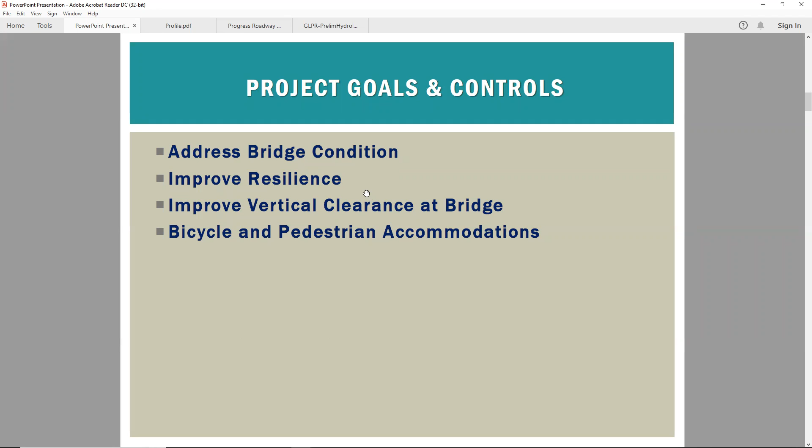So as Greg mentioned, we're going to go over how we got here, just reviewing quickly the goals and the controls. And then we'll look at the profile, the plan, the property impacts, talk a little bit about the bridge design, then open discussion and next steps. Going back to the beginning, our basic goals were to address the condition of the existing bridge, to improve or provide resilience, to improve the vertical clearance at the bridge, and to provide bicycle and pedestrian accommodations. The bridge condition is addressed by providing a complete replacement.

We talked a lot about resilience, and just to rehash some of the basics, the low point on the roadway now is elevation 7.8. The 50-year flood event elevation is 7.6, and the 100-year is about 2 feet above that. We noted that trying to increase the elevation of the causeway has substantial right-of-way impacts, and so we settled on a target of elevation 8.6, which is 1 foot above the 50-year event. And we also aim to improve resilience by armoring the causeway with heavy riprap along the banks to prevent washouts. Jonathan, you said 1 year above. 1 foot above the 50-year event. Sorry if I misspoke.

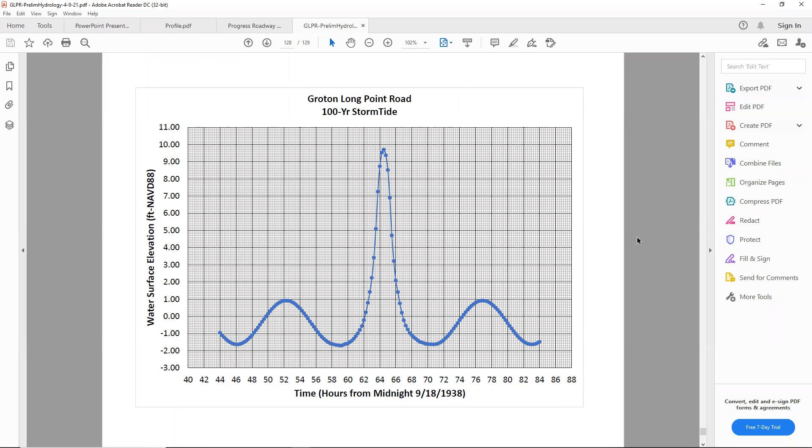Our next goal was to improve the vertical clearance at the bridge. Control for that was obviously right-of-way impact. Because there is some distance between the bridge and the adjacent properties, we were able to pick up the low chord, which is the bottom of the steel on the bridge, substantially. You'll see later in the presentation, the proposed profile provides a foot of underclearance for the 50-year event, which is a gain of 3 feet above the low chord of the existing bridge. The bottom of steel on the existing bridge is at about elevation 5.6, and with our proposed design, we're going up to 8.6.

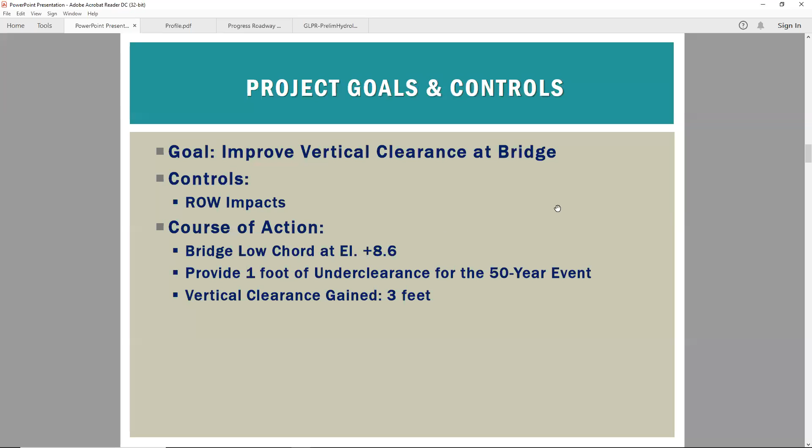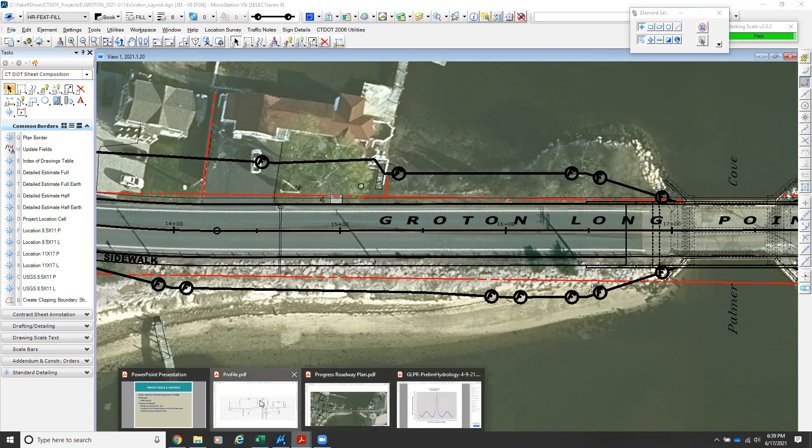Sorry, Frank, you're muted. Jonathan, we probably should save our questions for later, but you lost me. I thought you had a roadway elevation of 8.6. Roadway, blacktop. I'll go quickly to the profile. Our low point is away from the bridge. The existing low point is in front of 981 Groton Long Point Road, and that's about 7.6 at the edge of road. I see. Looking at the profile, that's back here. The bridge is a couple hundred feet away from that.

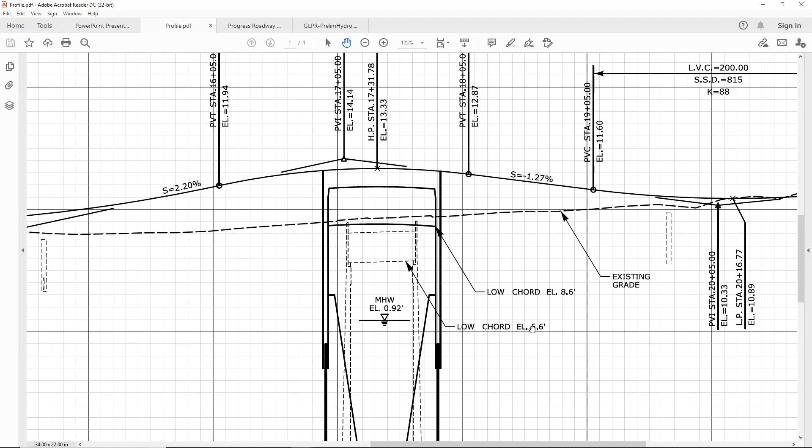But we're making an adjustment. This dashed line on the bottom is existing grade, and up here is proposed grade. So we're not picking up the whole causeway, but we're picking up the bridge and sloping up to that from either approach, such that at the bridge, the bottom of the new bridge is at elevation 8.6 versus the bottom of the existing bridge, which is at 5.6. Thank you. Clear.

And the last goal here was bicycle and pedestrian accommodations. Again, controls were right-of-way impacts because there's no sidewalk there now, and we are widening the roadway slightly to provide bike lanes, and we are adding a sidewalk along the south edge of road. So I guess the right-of-way impact affected which side of the road we chose for the sidewalk, and that's what led us to put the sidewalk along the south edge of road.

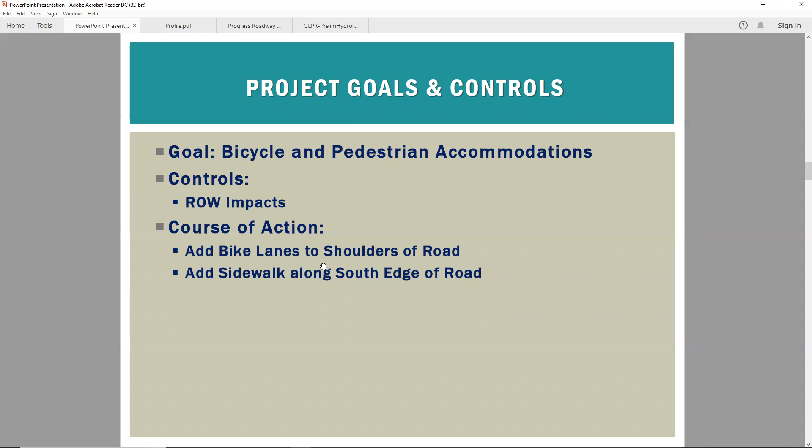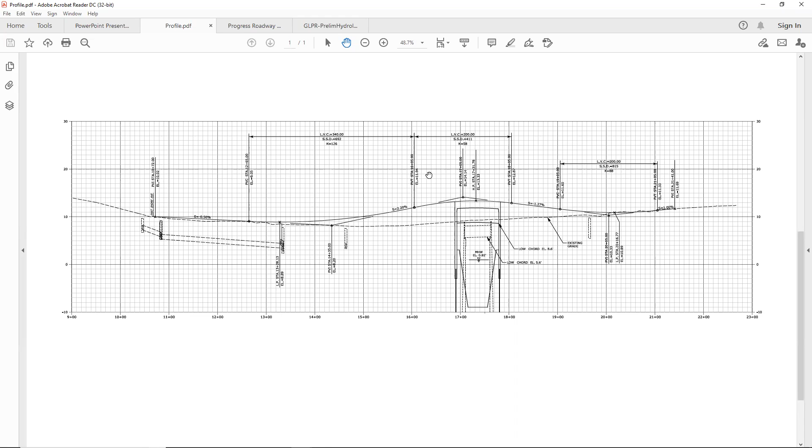So just to get back into the profile. The project goes from East Shore Ave, where we're matching grade. I know this is going to be difficult to see, and I have emailed everyone this figure as an attachment. And we're also matching in at the east end of the project in the vicinity of the restaurant and the beach.

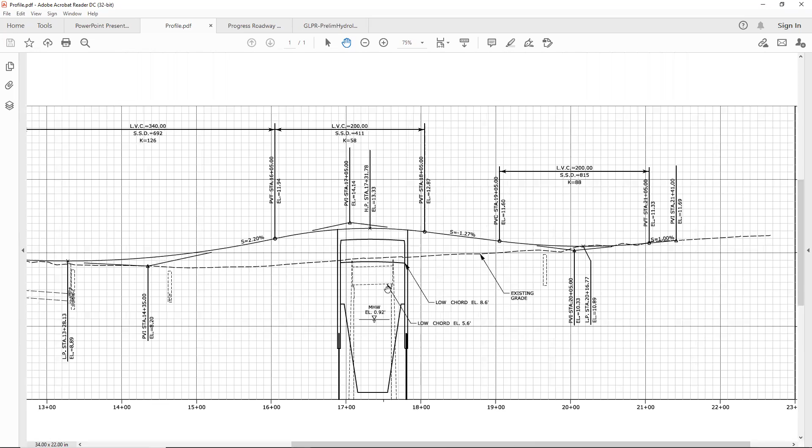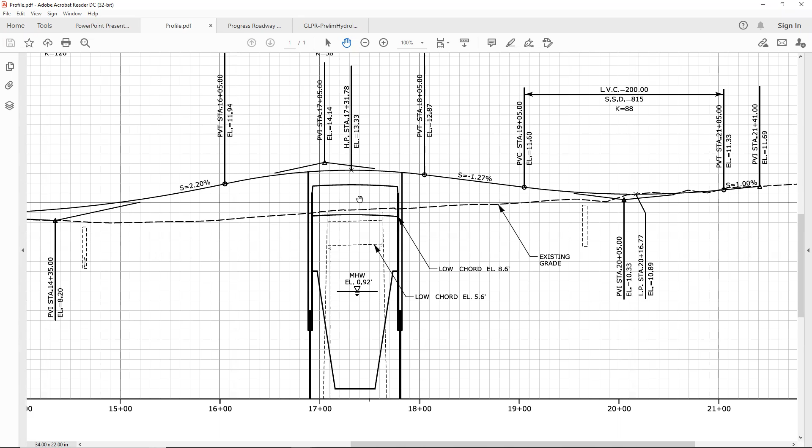And we discussed how much we're picking up the bottom of the bridge, which is about 3 feet. Because we have a longer span, we're going up to an 86-foot clear span in order to bridge over the existing substructures and build behind them, as well as to open up the waterway. We need a deeper structure, and so we're picking up profile grade by about 4 feet at the bridge in order to get that 3-foot additional underclearance at the bridge.

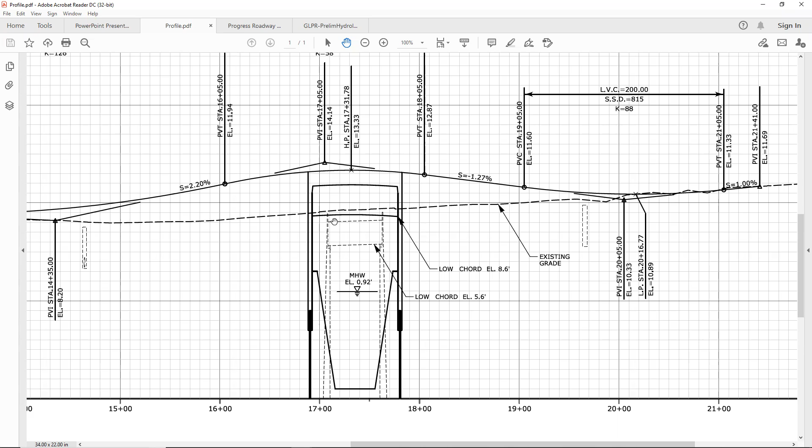Sorry about the cat.

Does anyone have any other questions about the profile? No. I guess one other thing I'll mention is we were able to move the low point away from the bridge to a location where there are existing drainage structures as well as a drainage right-of-way. So there's a drainage right-of-way down this driveway here, which would be convenient for design to be able to utilize.

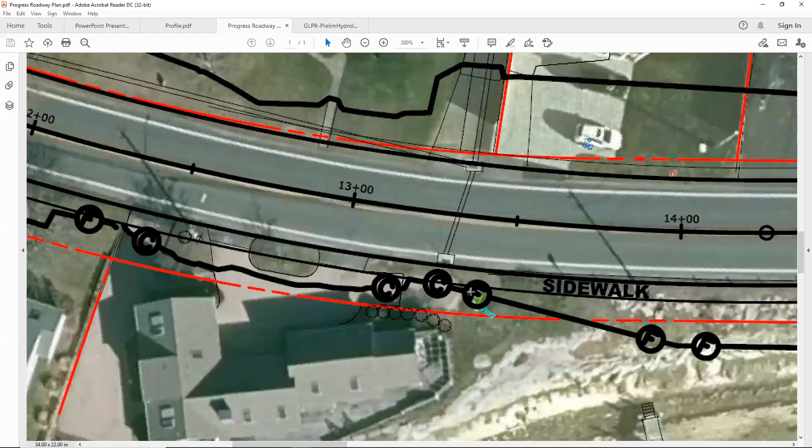All right. Now on to the roadway plan. This figure was also emailed out to the group. What is shown on here, in brief: the project limits are basically shown on this sheet. In red, you will see the right-of-way lines. These dark lines that have an F and a C in them are cut and fill lines, and those basically represent the extent of regrading beside the road. So where you see an F, that's a fill line, and where you see a C, that is a cut line.

So along the north edge of road, we are filling a little bit on these properties. The line is the limit of the fill, basically where the fill starts. There's 0 fill at the line, and it increases in depth as you go toward the roadway. The same would apply to a cut line. For example, at 1000 Groton Long Point Road, along this line there is no cut or fill, but that's the cut line. We are cutting a few inches down at the edge of road, so the elevation of the driveway here is dropping a little bit.

And you would think that there wouldn't be any cut because we're increasing the elevation of the causeway, but the roadway is not uniform in its slope. So it happens here that we end up with an odd little bit of cut at this location. But generally we are in fill. And the grades for the driveways have been limited to a maximum of 15%. And wherever we are filling in someone's lawn, we are at a maximum of a 6-to-1 slope, which is relatively flat and maintainable.

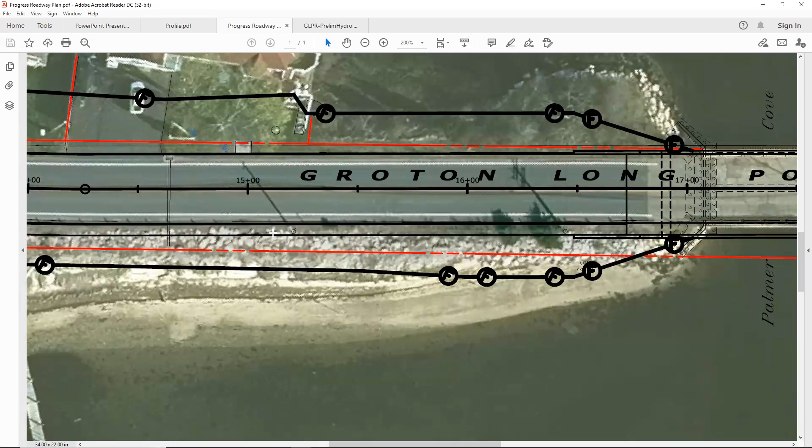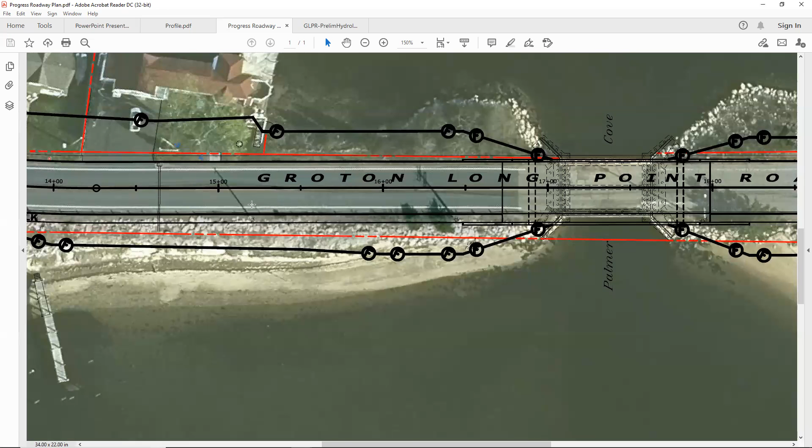So that steep slope continues along here from station 14 up to the bridge on the south, and from about station 1525 to the bridge on the north edge of road. And similarly east of the bridge, this area here up to about station 1950, maybe 1900, has that 1.5-to-1 riprap slope. And then along the north edge of road, that steep riprap slope ends at the little bit of lawn here adjacent to the restaurant.

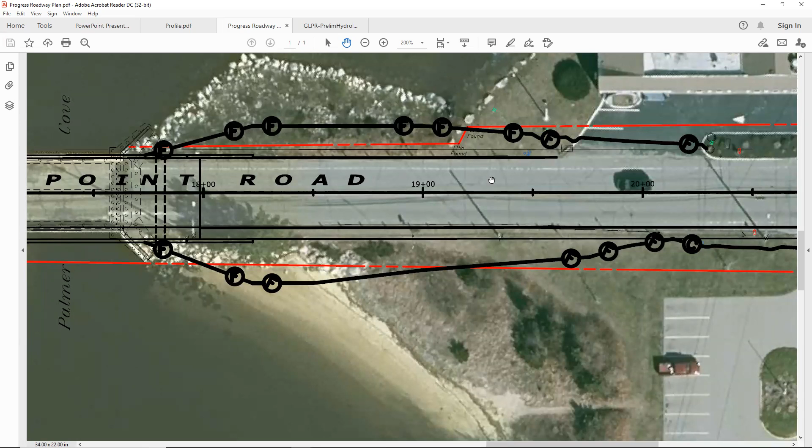So right-of-way impacts. I'll just use this figure, although they are in the presentation as well. You can see that we have the sidewalk along the south edge of road within the right-of-way, and that in front of these properties on the south edge of road, the cut and fill lines are all within the highway line. As we go toward the bridge, the heavy riprap does have to cross the highway line. But this is an area, again, that's already riprapped. It's just that the toe of slope moves a little bit to the south.

Along the north edge of road, there are more substantial property impacts. We've been speaking mostly about 991 and 981 Groton Long Point Road. Although the cut and fill lines do extend pretty far onto the frontage of those properties, again, the slopes, we were able to maintain something reasonable for those with the 15% max for the driveway and the 6-to-1 max for the lawn areas.

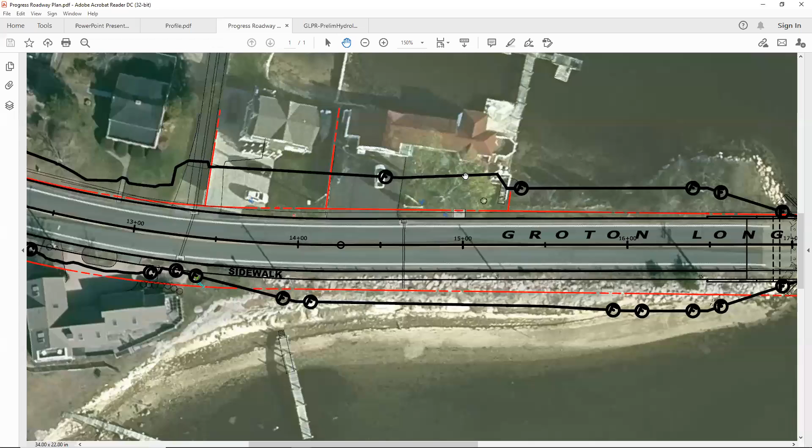Greg and I were out at the site and looking at 981, which has a couple of trees in the lawn here, and we looked into that pretty closely and felt that the amount of fill at the trees was minimal, so it was not going to damage or be a threat to this tree here, and it doesn't extend to this tree.

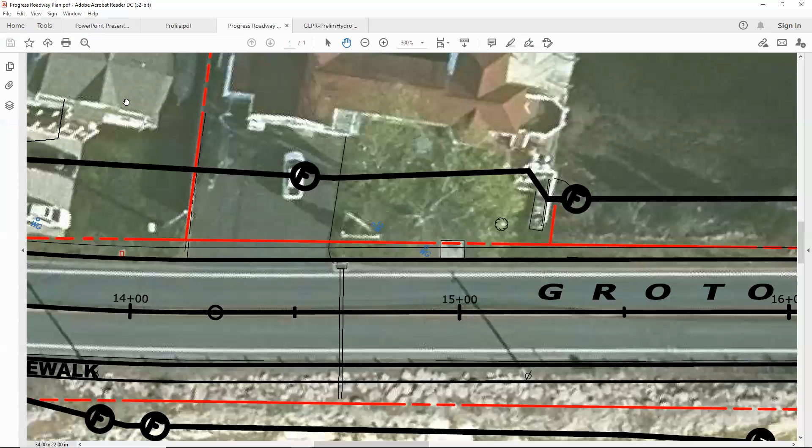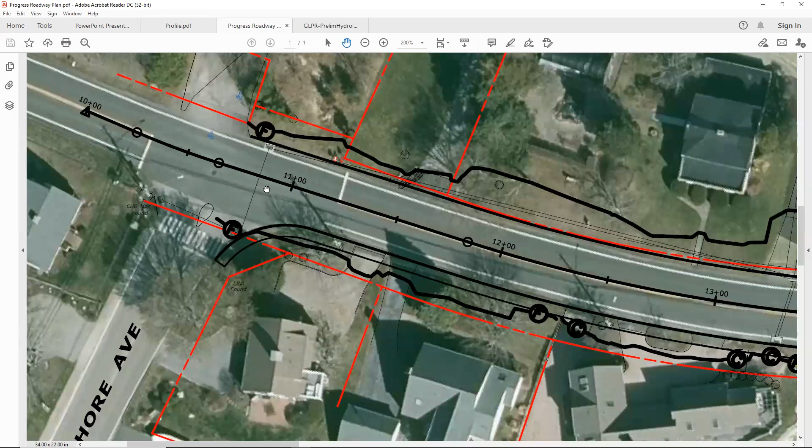In these figures, I want to point out that at the project limits, these areas are in development. They're still being worked on. Our concept is to bring the sidewalk to the crosswalk and to terminate it there. The area in the intersection here, the extent of the paving is not finalized, but in this area, it would just be like a mill and overlay, and you would get into full depth as you go away from the intersection.

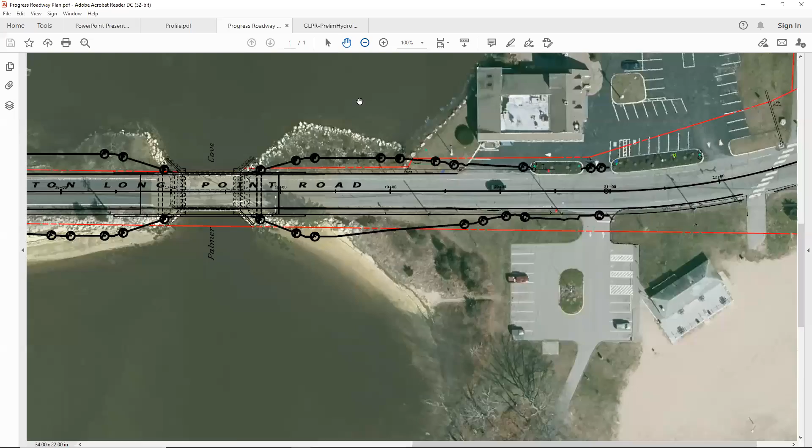At the east end of the project, our goal is to bring the sidewalk to the crosswalk here at the beach. A little bit of realignment of our baseline is still needed here. We don't intend to realign the road, but this is something that still has to get cleaned up a bit. But the cut and fill lines are certainly accurate through the middle of the project. Just the ends are still a bit of a work in progress. Does anyone have any questions about property impacts?

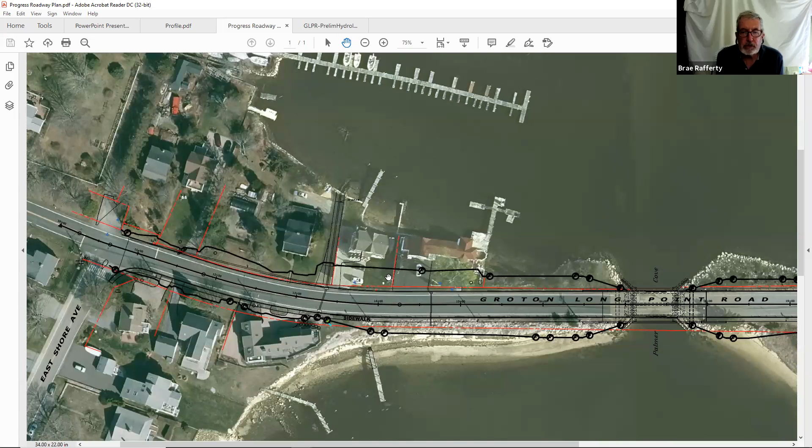Question right where you are now, on those two houses on the north side. Yes. You had a picture of the actual front of the house. 981. Yes, this is just Google, but yes. And I'm not quite understanding how much fill, how high up is the lawn going to be, let's say, in the future? You know, are you raising this thing up 3 feet? Are you raising it up a foot? Yeah, that's a fair question.

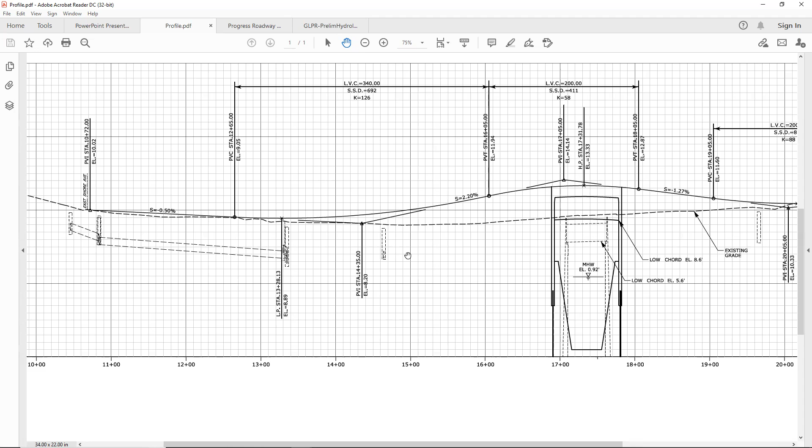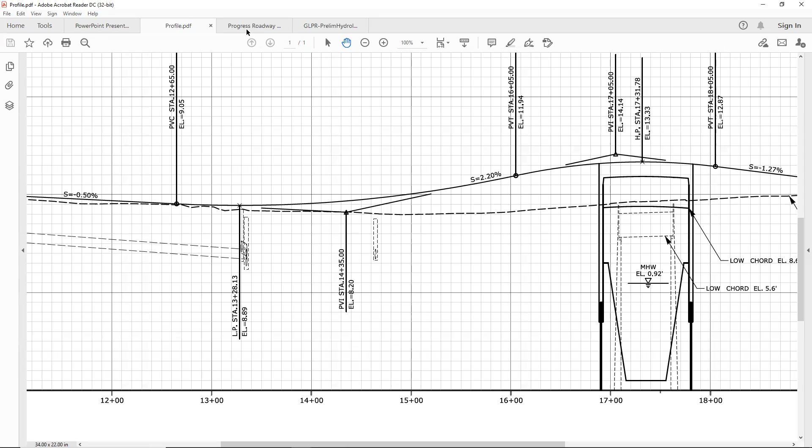So looking here at the baseline in front of the property, which is our frame of reference when we look at the profile, you can see the driveway is at about station 1425. And then we're going to about station 1525. So we're looking at this 100-foot frontage here. So I go to the profile and I look at those same stations. Here's 1425. At the driveway, it looks like there's about 1.5 feet, maybe. That's out at the center line of the road. And then at 1425 would be back here, about a foot. And then 1525, just a little over 2 feet. And that is in the lawn area.

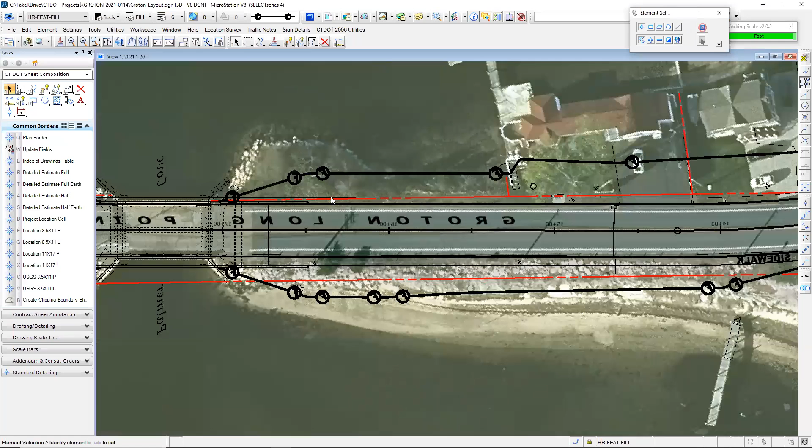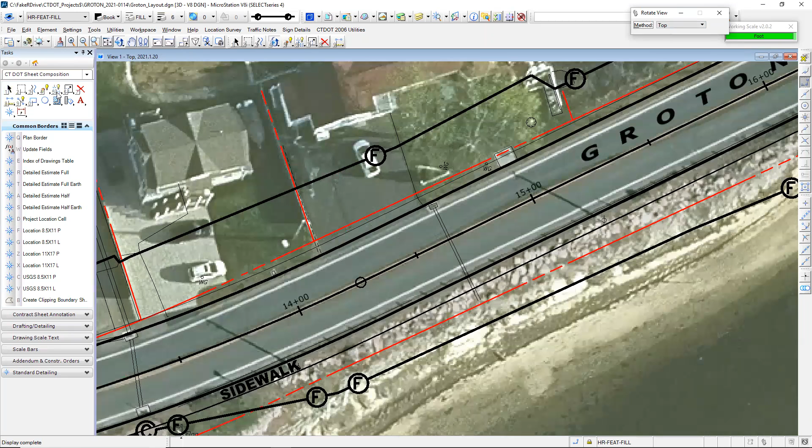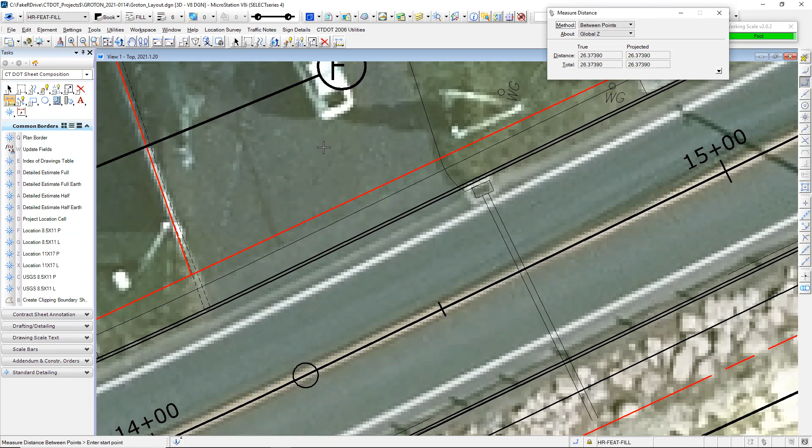So let's go back to that street view. Oh, sorry about that. So we're talking about a foot at the edge of the driveway here. And that would be the height close to the road. And go back to my MicroStation file, which somehow got moved around. Okay. So the limit of that fill in the driveway is about 26 feet. So it's going to extend to about the edge of where these cars are parked here.

So the driveway will obviously get steeper than it is. The driveway will have to be higher than the roadbed so that you don't have runoff going into the house. Correct. Yes, and that is the intention. There will be like a lip along the edge of the driveway and then a little bit of a hump and then it'll come up even beyond the roadway elevation. So the first few feet of the driveway will drain toward the roadway. Right.

And John, do you have those cross sections? Only the lip of the driveway really for some distance in will be higher than the roadway? Yeah, so the standard detail is usually there's a little lip right at the edge of the road. Maybe an inch to an inch and a half. And then you have a little slope up toward the house so that water drains down the apron toward the roadway and not from the roadway down the driveway toward the house.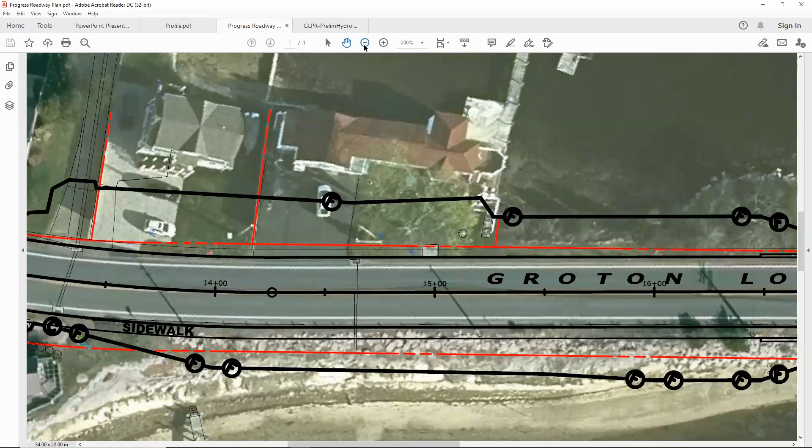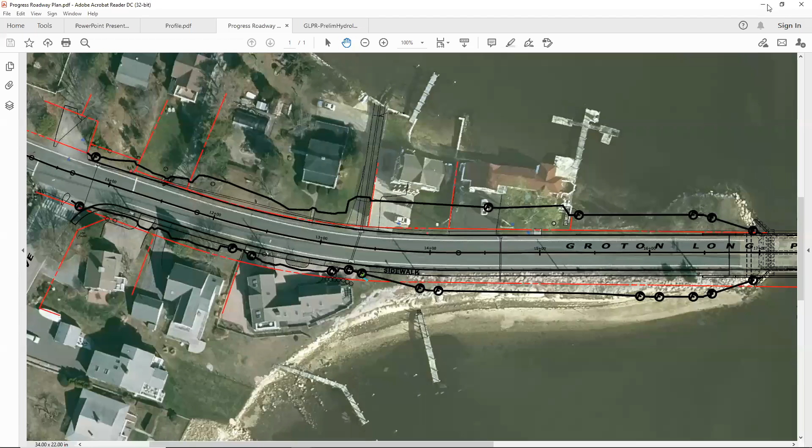Any other questions about property impacts? I know that some of the figures are difficult. I'm trying to be as transparent as possible. But we'll move on.

As far as the bridge goes, I know that this is the figure that was shown to the town early on, and it's still a fairly accurate representation. It doesn't show the rise in profile grade at the bridge, which again, we said was up to 4 feet. And we do think the project will extend a bit further to the east than is shown here. But the limits of the walls will be about the same as what's shown here.

We will use an open rail along the bridge. And we will be cutting these abutments down, so you will not see this as it's shown here, but we will have heavy riprap slopes similar to what is shown here.

Here's a view of the existing bridge, and just to emphasize, we have a 50-foot clear span now. That elevation 5.6 is the bottom of the steel, and the channel bottom moves over time. I've reviewed the inspection reports, and you have aggradation scour and degradation scour. So just the flow of water through here brings in sediment and deposits it, and then washes it away in kind of a cycle. So that's why you don't see a uniform channel shown on this figure. 50-foot span, 5.6.

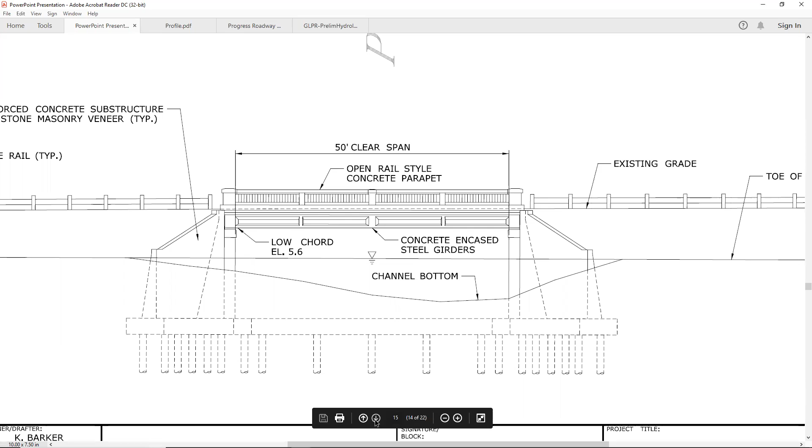And for the proposed bridge, we're going to an 86-foot clear span. That is to build our proposed abutments behind the existing abutments, so we don't have to remove what's there in its entirety, which would be difficult.

There is an opportunity locally to do some work in the channel. I know there was a question early on about dredging. It would be outside of the project to do dredging of the channel, say out in the cove or on the sound side, but we can clean things up certainly locally in this area. There'd be an opportunity to have an improvement for boat passage here.

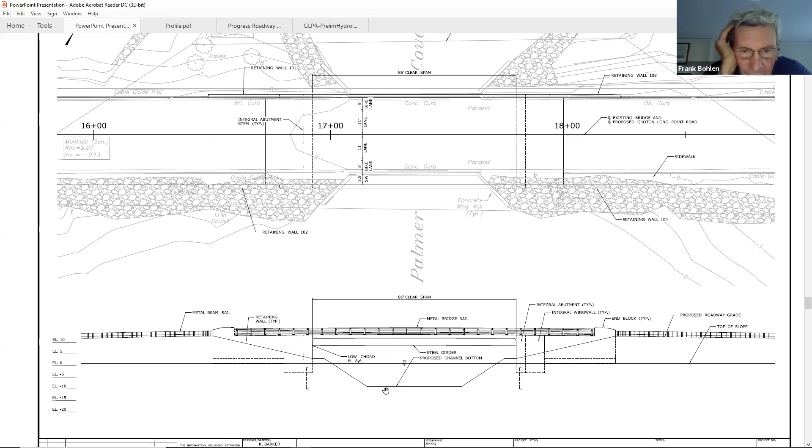Right. The channel you're showing, Jonathan, has been reconfigured. So you're figuring a dredge down there. Yes, so we already have to remove the existing abutments. So we're already into the channel just for that purpose. And then I guess just when that work is done, some of that's going to be addressed.

So 86-foot clear span, the low chord 8.6. That's the bottom of steel, which is 3 feet above the current bottom of steel. So I think that's a significant improvement. I'm sorry, it looks like your channel depth, the depth is a bit, we're showing it's a little bit deeper here.

And certainly, if you go back to the previous figure, at the time that this was drawn, this was taken from an older report, but it had showed some aggradation. They call it aggradation scour. So some sediment had built up along the western abutment. And again, this is a cycle. It's probably different now, and it would probably be different if you went out there next year and measured every year or every 2 years when the bridges are inspected.

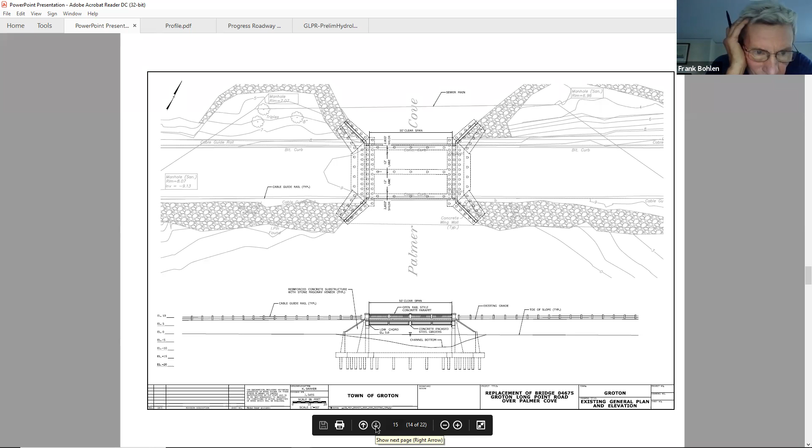On the new drawing, the water depths look to be about 5 feet, maybe 5-6 feet here, if I'm reading this right. But on the drawing you just showed me, the new one, first of all, the configuration is nicely symmetrical, which it won't be, because historically the flows favor some asymmetry. Well, right. It would eventually become some different arrangement. Initially we would have some riprap in here, and that would likely fill in with sediment, and the shape would change over time.

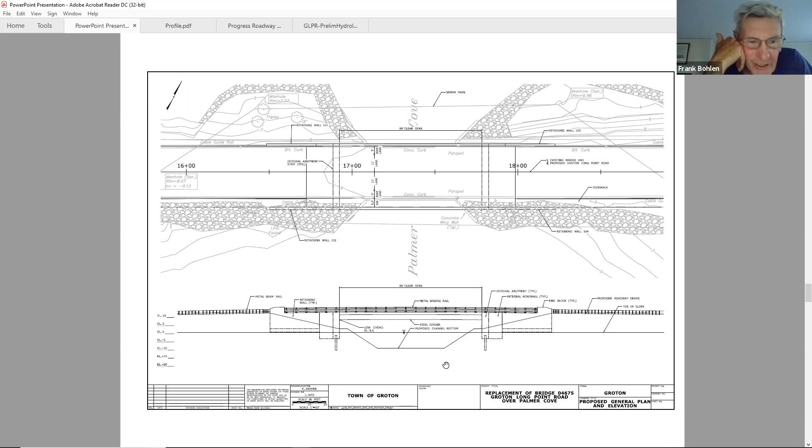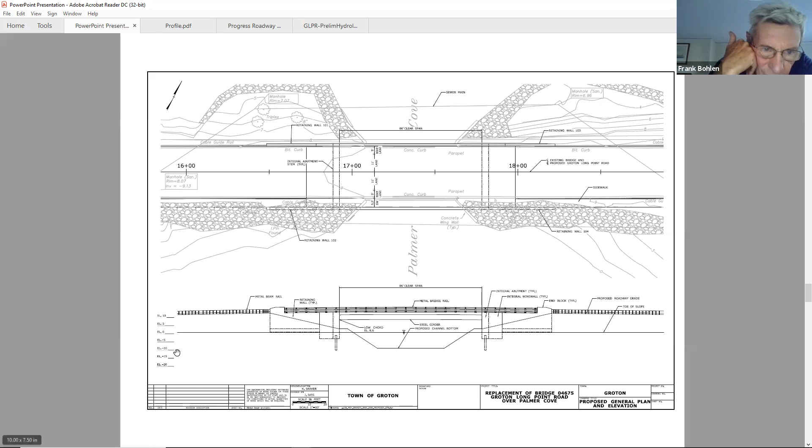Yeah, well, we looked at a lot of these, and there's design and reality. But I'm thinking that you're going to dredge to something closer to 10 feet on that drawing. The bottom looks to be about, yeah, running across. I don't know. It doesn't make any sense to put a square on this thing, I guess. I'm not sure it should be that deep. Yeah, there may be an error there, Frank. I believe the bottom of the existing is about -8. Oh, sorry, I'm in the wrong one.

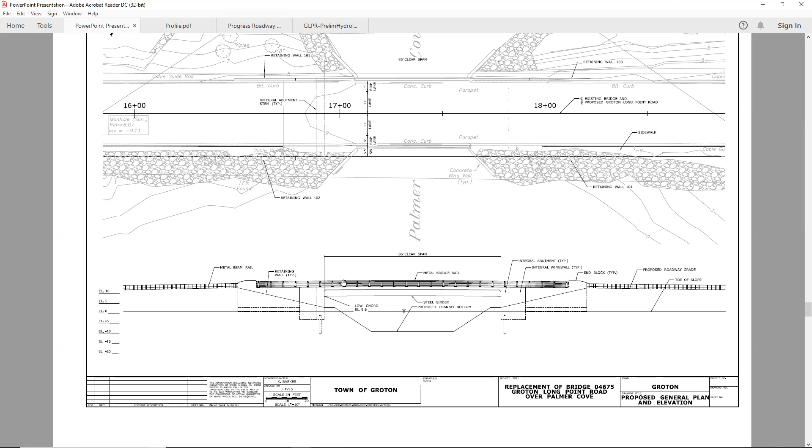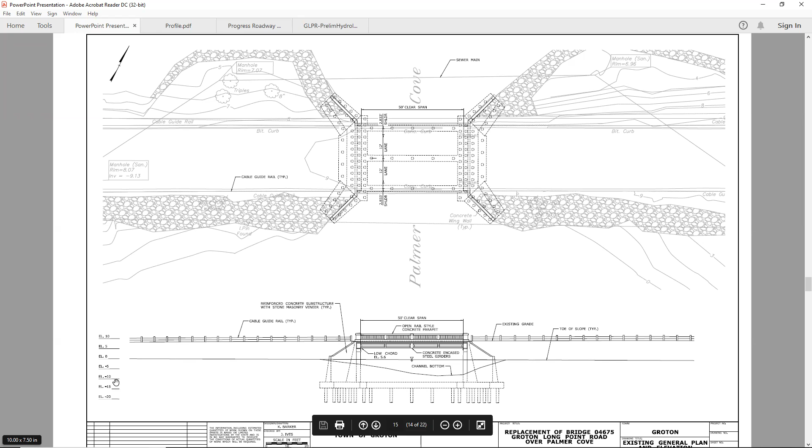But I think you're correct. I think that's too deep. That one there, I'd say 5'6", something like that. Maybe. I have it in my mind that the bottom of the existing channel is about -8, and what we intended to show was like -9. Right. A small difference, not a large difference in depth. But when you're going to have an 86-foot span, which you don't have now, the mean velocities are going to be lower, so your tendency is to get a little bit shallower, probably some accumulation, possibly. Yeah, water does move pretty good through there now. Yep.

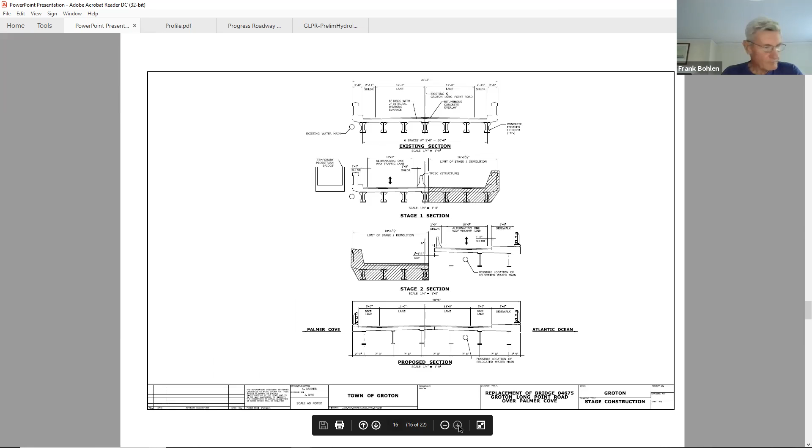And here's the staging. You may have seen something similar if you looked at our past reports. What is notable on here is now we're showing the difference in elevation between existing and proposed. The steel girders are about 3 feet deep. And so you can see that's also about the difference in elevation between the bottom of existing steel and the bottom of proposed steel. We are showing a steel bridge.

We have done a design on that just to get a depth and know that we were going to be accurate when we did our work on the profile, and that we would be able to tell you with certainty how much of an increase in clearance you would be getting, and to know that we had the right target for the profile over the bridge. The staging right now is showing a temporary pedestrian bridge. That is something that certainly is up for discussion with the town as far as whether that is desired during construction.

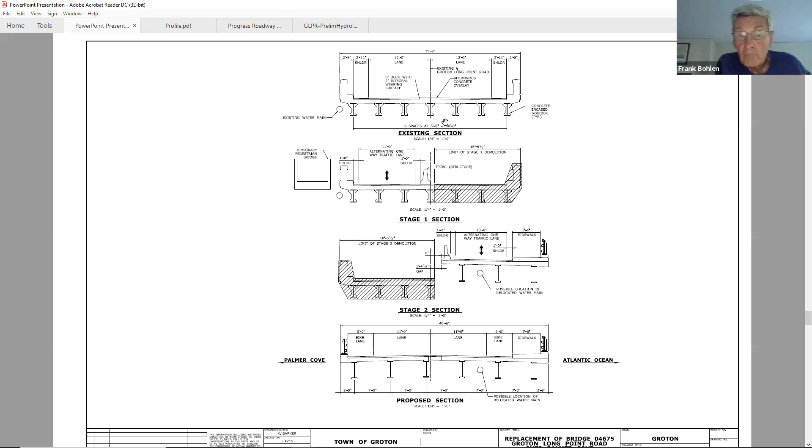So in the first stage, we have alternating one-way traffic on the existing bridge while we demolish half of the existing bridge. We have about 13 feet to work with here, which is like an 11-foot lane and 1-foot shoulders. So it's not a good accommodation for pedestrians, but if we were to accommodate pedestrians on the existing bridge during construction, we would be talking about a substantial widening with a proposed condition, which we don't want to do.

As we go to stage 2, we'll be maintaining alternating one-lane traffic on the proposed bridge while the remainder of existing is demolished. But here in stage 2, we've added the sidewalk on the proposed bridge, so there is a place for pedestrians to have safe passage. And again, on the proposed bridge, as we've discussed, once this is completed, we'll have 11-foot lanes, 5-foot bike lanes, and the 5-foot 6-inch sidewalk.

The water main that's carried along the north fascia of the existing bridge will be somewhere beneath the proposed bridge. Now we're showing it on the first stage of bridge construction so that the water main can be maintained.

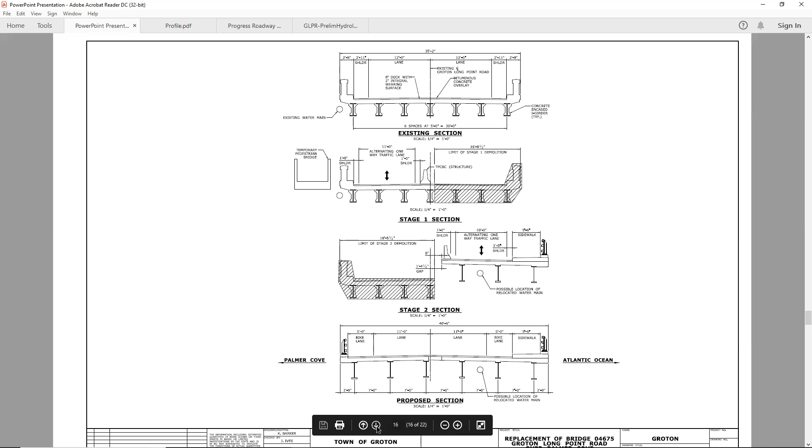The railing that was shown in the early renderings doesn't meet the current crash test standards, which have changed since that rendering was developed. But it's an open rail. There's pickets on the backside, which is necessary when you have pedestrians. You can't have anything greater than a 4-inch opening. And I would anticipate similar end blocks where you could either have form liner, or in this case, it's a stone veneer, which is very durable.

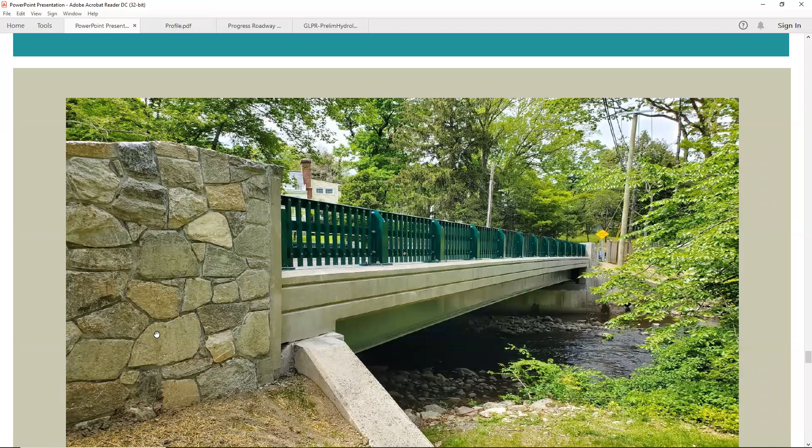Just thought this was kind of an apt example. That looks real nice. Yeah. Thanks. In this case, the color is green, but the color can be whatever you like, whatever everyone agrees on, I should say.

When you remove the abutments, are you going to pour cement for the new ones? Is that like the last picture? Let's see here. You can see that cement wall under the bridge. Yeah, so in this case, this was actually a superstructure replacement. So this project used the existing abutments; the tops of them were just modified to accept the new superstructure. Oh, okay. In our case, we'll be demolishing the existing abutments and building behind them. And there'll be a reinforced concrete structure. I can go into that just a little bit.

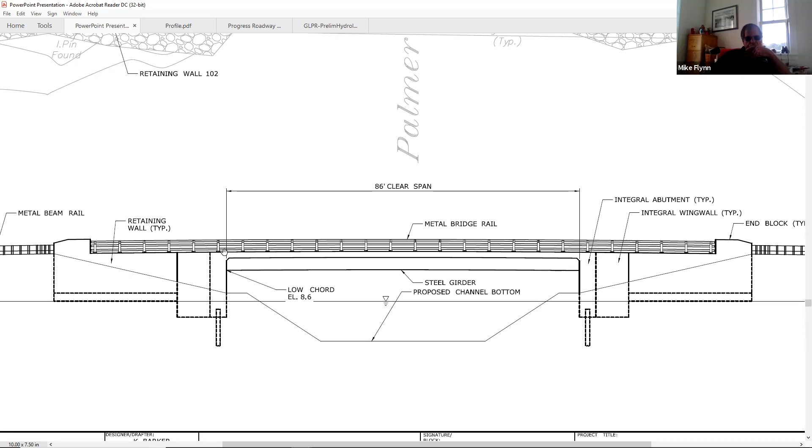What we're proposing is called an integral abutment structure. And what that means is the steel girders run right into the abutments. They don't sit on a bearing here. The concrete deck is integral with the abutment. It continues down. It's a very resilient structure. You know, in the 100-year flood, we would be under pressure flow by, I think, about a foot. So picture water being up above the low steel, and then you have wave action potentially on top of that. But this is a structure type that would be very adept at handling the loads that would be caused by that.

And also it has no bearings that would need to be maintained or adjusted. A typical problem area for bridges is the ends of the steel girders. When there's a joint there, water eventually gets in, and salt, and just rots out the steel. So although we are proposing steel, we would be proposing metallized and painted steel. Metallizing is a hot thermal spray of aluminum and zinc that provides corrosion protection. And on top of that would go a paint system that would be compatible with that. So it's kind of a double protection.

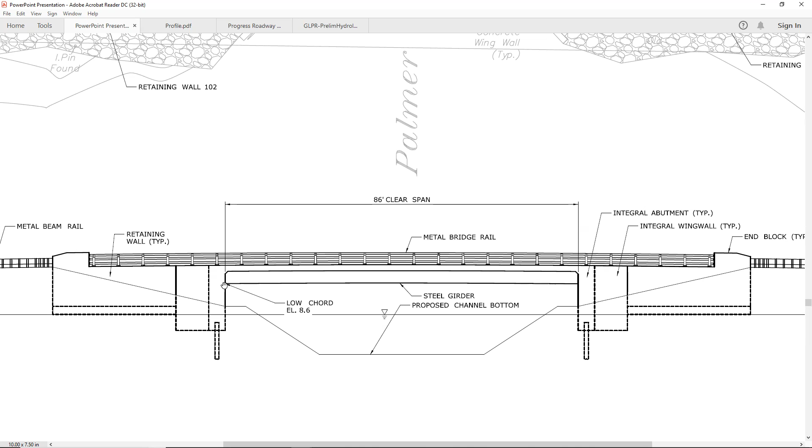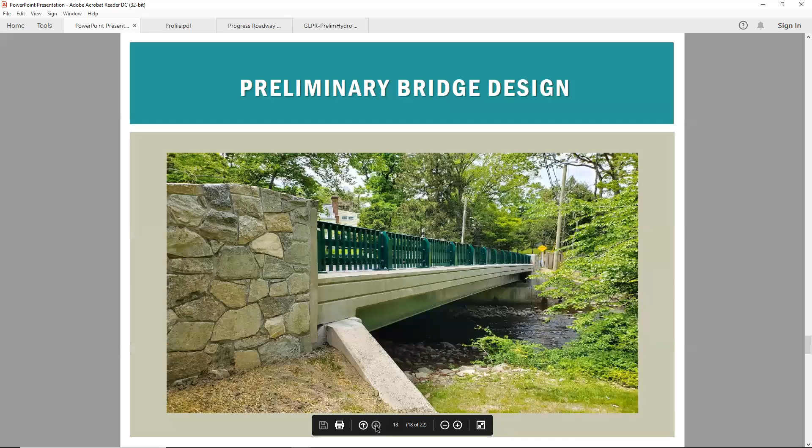And I think steel is appropriate here because you have the marina, and you know that even though we're providing an increased vertical clearance, they're just going to get bigger boats and the steel is going to get hit, and steel is very resilient and repairable. Whereas if we had concrete with internal pre-stressing strands, once those are damaged, they're very difficult to repair. So that's kind of some of the thought process that's gone into the layout of the structure. Any other questions or discussion items?

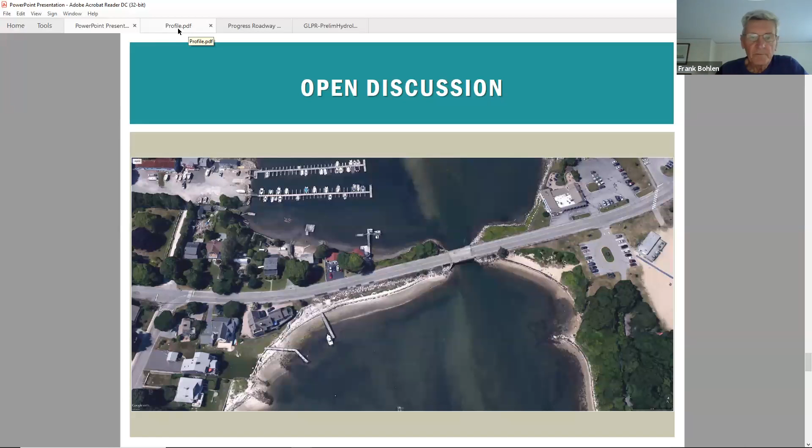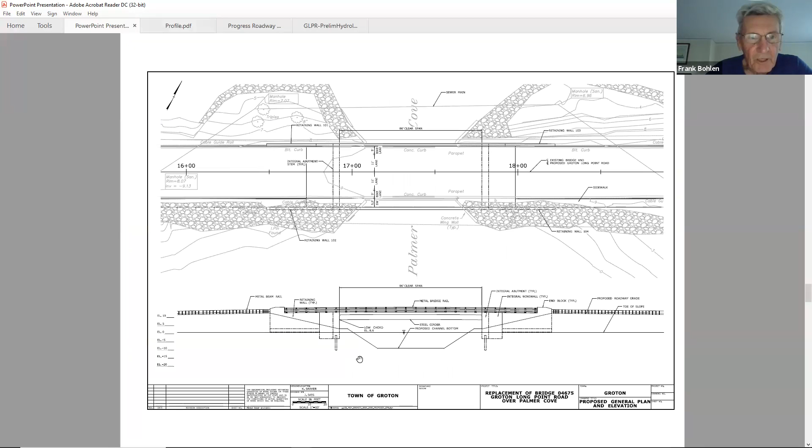Oh, yeah. Can we take a look at the proposed bridge elevation? Sure. Would you like to look at the profile or the picture of the... I'm looking at it from the side, the elevation. Oh, sure. Yeah. And I had a question in my mind, maybe back to the whole roadway, one of the first slides you had. I had a question about why the hump at the bridge. That's it there. Yeah, that's it.

Yep. I would be coming up a little bit and I have sort of a smooth roadway running down to the Groton Long Point Road, the main road there, whatever the name is. And the problem with that is that it really brings the road up quite a bit relative to the property owners on the east side there, or west side, I guess, right? And because from a flood standpoint, it's the low point that's going to flood anyway, so why raise the bridge up?

I guess the advantage of raising the bridge up, of course, is to give a little bit more clear span under the bridge, like 3 feet more. And it also puts the bridge a little bit higher relative to the highest water levels, 100-year flood level, plus sea level, another foot and a half or so, and the wave attack. So is that all? Am I right on all of that? Yeah, those are all advantages to having the bridge picked up.

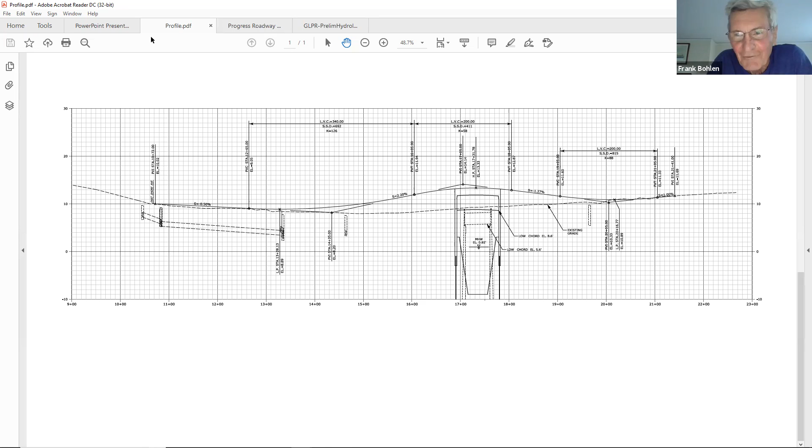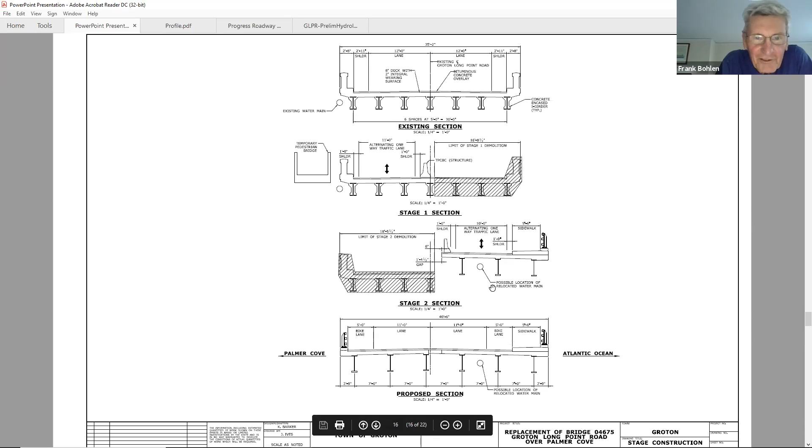Right. Then I thought I heard you ask me a question. It sounded like, should we have a pedestrian way during phase 1 construction? Or did you say you were going to have one? Let's go back to the staging, second slot down there. This figure is showing a temporary pedestrian bridge in order to provide a safe passage of pedestrians while there's alternating one-way traffic on what will be a fairly narrow piece of the existing bridge. So if you were asking me, I would say absolutely have it. That's not a question. Yeah.

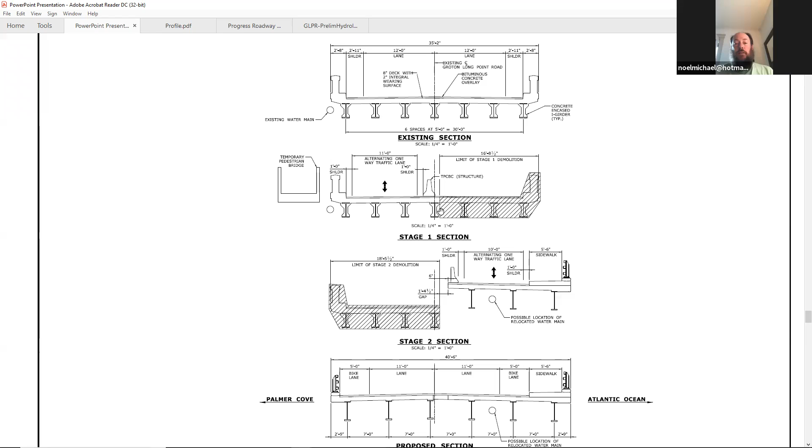We're talking about a year. Typically stage construction is a 2-year process. A year for stage 1. You have a lot of sheeting and removal of the existing structure and constructing proposed. So it might take you 1 year to get to here, where you have alternating one-way traffic on the proposed structure and you have your sidewalk. So maybe it's 5 or 6 months where, if you don't have this ped bridge, you're not going out of your way to provide safe pedestrian passage.

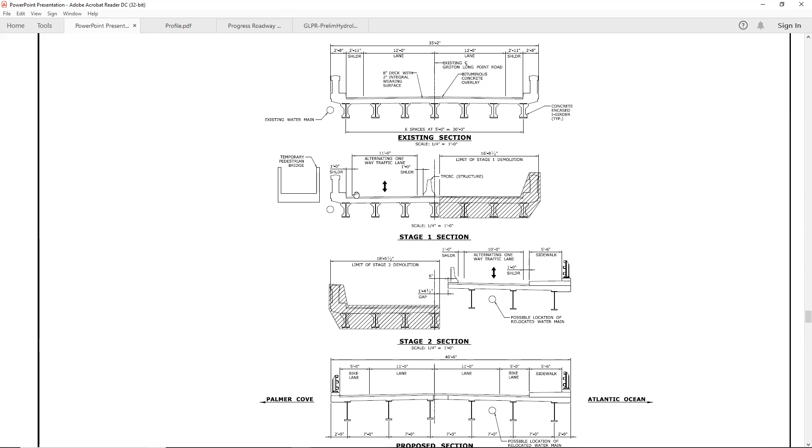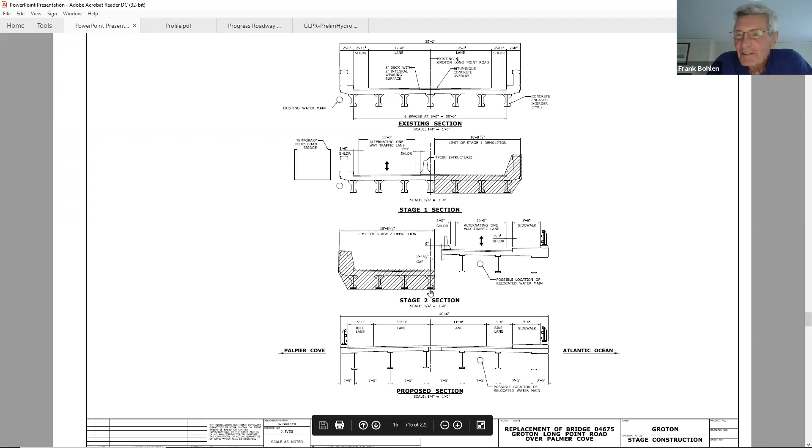Right. And the last item from my notes from a couple of meetings ago, Mr. Hanover may care to address this. There was some question about property rights that came up during the discussion of the sidewalk. Has all of that been resolved? The Groton Long Point Association is happy with all of this? No, that's not been resolved yet, Frank. Okay. But we're still within the right of way, so it's likely we'll be able to keep the sidewalk where we have it proposed now, right? That's what the town believes, yes. Okay, that's good. It's definitely a benefit to everybody to have all that extra viewing space.

When do you start construction? Also a good question. So the federal local bridge program process is a process. We're getting a jump on it by doing some preliminary design to go along with the application to get the funding. The reason why you go through this process is that they provide an 80% share, which is substantial. Getting into the federal local bridge program means there is state oversight and liaison engineer oversight. And it is typically at least a 2.5-year to 3-year process.

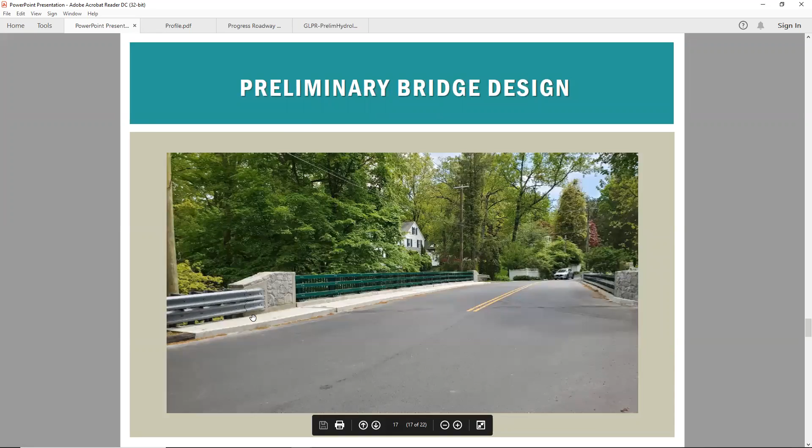You showed the railings, proposed railings for the bridge, the green railings. What happens out here along the road? Yeah, that's a good question. Let me go back into the presentation and look at the rendering. So this rendering was showing a box beam guide rail tying into the end block. The end block is connected to the metal bridge rail. So it's a continuous system that goes all along the road.

On the bridge, you have that heavy metal bridge rail, which has almost no deflection when it's hit. Along the causeway, you have a guide rail which has a deflection to it. What's probably not accurately represented here is that there is a flat shelf on the outside of this guide rail. So when the guide rail deflects away from the road, there's protection there. So the guide rail is a more flexible system, but it is connected to the bridge.

The guide rail has to end somewhere. So the guide rail ends where the slope beyond the edge of the road or the edge of the sidewalk is considered to be recoverable, meaning that a vehicle could go onto the slope and still be able to stop or get back into the roadway. So when you get to a really shallow slope, then you don't need the guide rail anymore.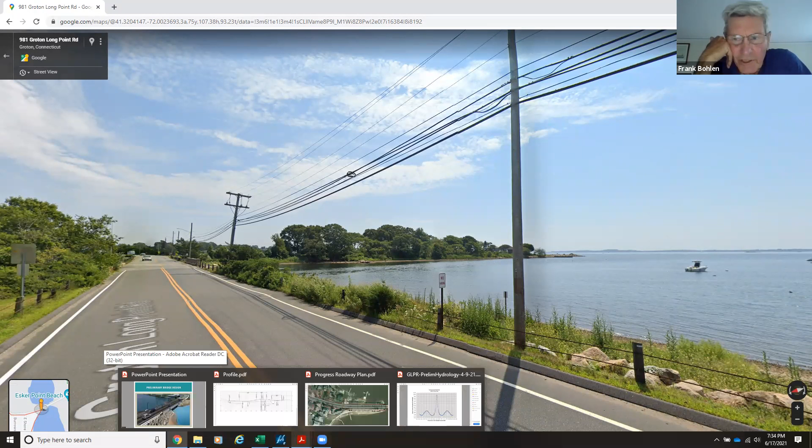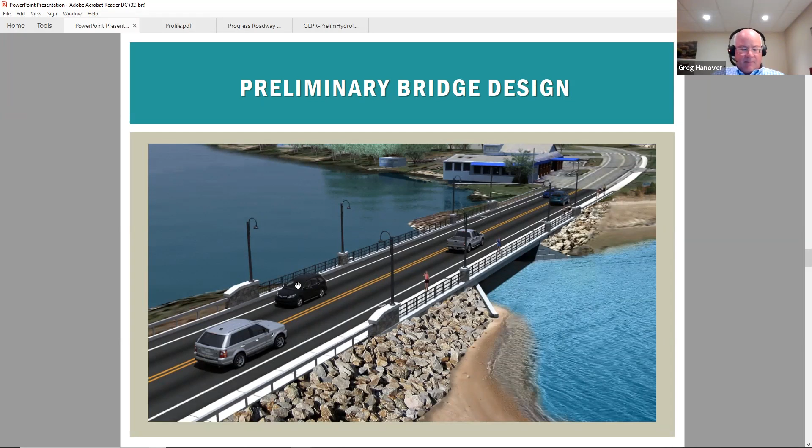And one thing about utilities that came to mind, are there any arguments about the placement north-south of that water line you have in there? Is one side a little safer than the other, or is there a location issue? Well, it's on the north side now, probably to protect it from wave action. But they're showing it in between the steel girders hung underneath the bridge now. Not quite to the south side, but I noticed they did move it down. Yeah, that was just for phasing, to keep the water from being shut off completely for a while. Right. So the phasing was arranged to get the sidewalk built early.

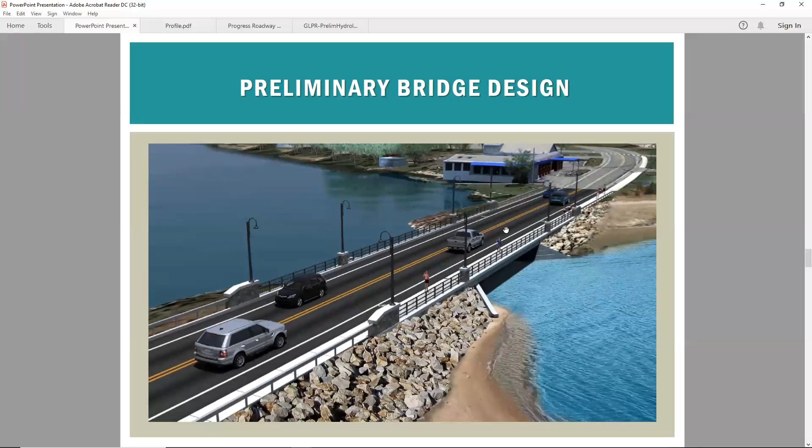Which is why there was a shift in the location of the water main. But also so that the existing water main could be maintained on the existing structure while the first stage of the new bridge is built. If you were to flip-flop and go to that drawing and try to have the water main on the same side, you would have to find a way to temporarily support this existing water main while you construct the new bridge over it.

Sounds familiar. Didn't you do that in Noank? Yeah, that's what they did at Mosier Avenue. You're in Mosier, right? They had to put a temporary in. That could also be done.

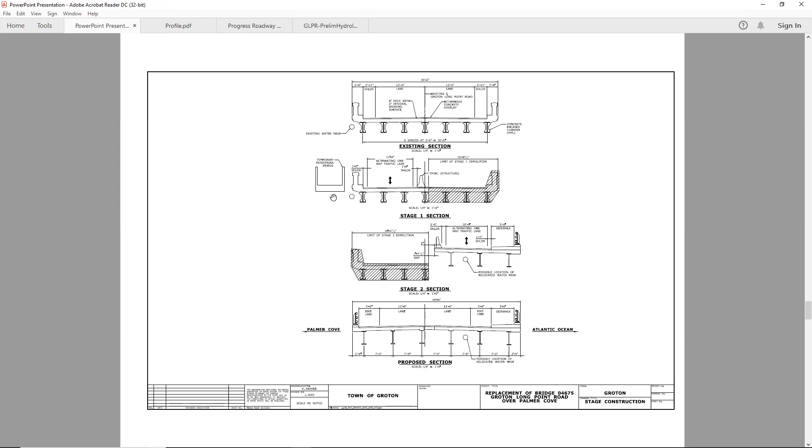So although we're showing it built in this first stage of construction, if that's problematic because of the routing of the water main in relation to other underground facilities, and they want to keep things on the north edge of road, the water main could also be supported under the bridge. You could have a temporary one here and just have a lesser shift in location. And then construct it in the northernmost bay of the proposed bridge, where it would also be close to the current location.

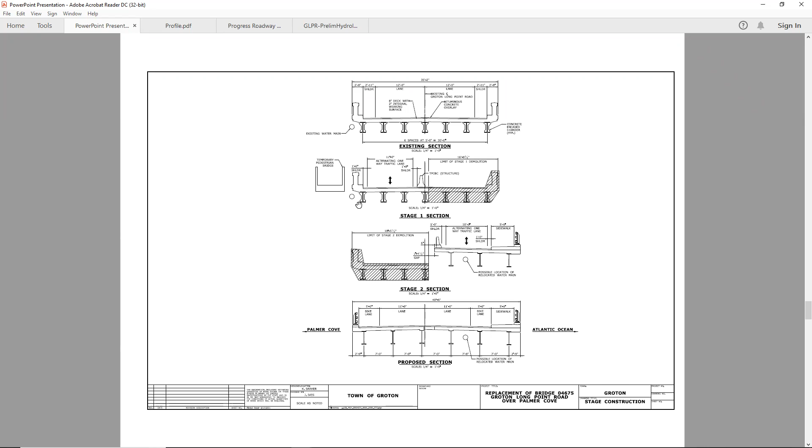Anything else? Sure.

Okay, let's talk about what's left to be done then. So we started putting together our plans that you've seen to show the impacts. We have to do a construction cost estimate that will be part of the federal local bridge program application. We have begun our hydraulic reports. We submitted the hydrology report. We needed to have the profile done and be solid on our layout to do the hydraulic report, because we need the new opening and then the shape of the causeway.

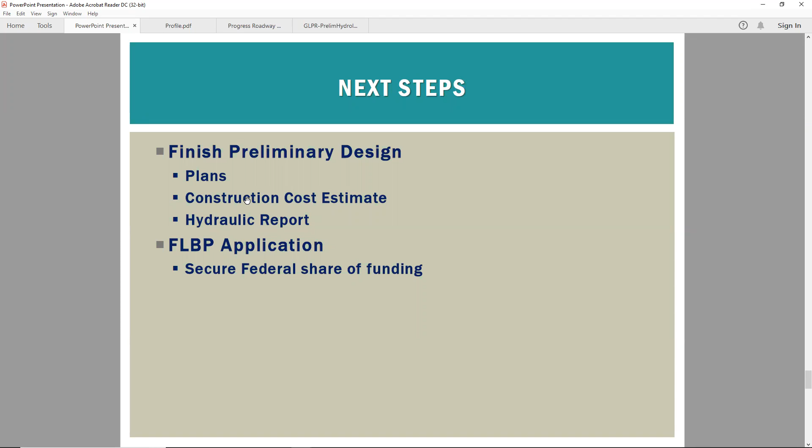So with that done, now we can move ahead with finishing the hydraulic reports and move ahead with putting together a funding application for the town, and finish our final reports and preliminary design plans, which is our current scope of work. And then that will go toward getting you those federal dollars for construction.

So let's talk about what I mentioned. We have some things to firm up on the plans at the project limits, but I think now we've shown you where we intend to go with the project. If we have a meeting in July, what would we like to see at that meeting? Or do you want to have a meeting in July?

Well, when do you think, Jonathan, you'd have the construction cost estimates and plans further along, or at least the cost estimate? We can move ahead with a cost estimate now. We could do that for July. That could be an action item. And in it, you might consider that business of burial of the utilities, et cetera, that sort of thing. I'm just making some notes here, and one thing comes to mind.

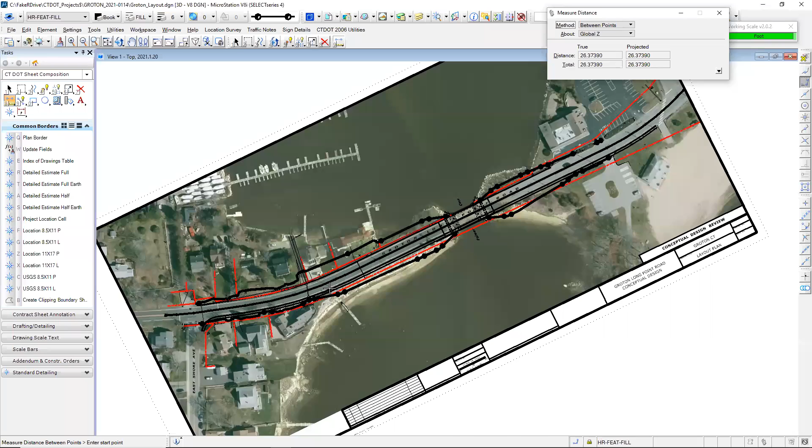So where that curve is, you'd be straightening, moving it a little bit to the north, so that first house, I see the right of way. You don't have a lot of room to move it, but if you moved it at least to the right of way, then you give that house just a touch more breathing room, and that'll make a big difference to them, I'm sure. Because they're the ones that are going to be the most impacted by the sidewalk.

They're not built into the right of way, are they? I can't quite tell that. No, they're right on the edge of it. That whole house seems to be, I see it. Yeah, okay. Yeah, I mean, right now, in front of the house, the frontage has no impact beyond the highway line. This house, we're showing an impact, yeah, 981, right, a substantial impact as far as how far the fill slope goes onto the property.

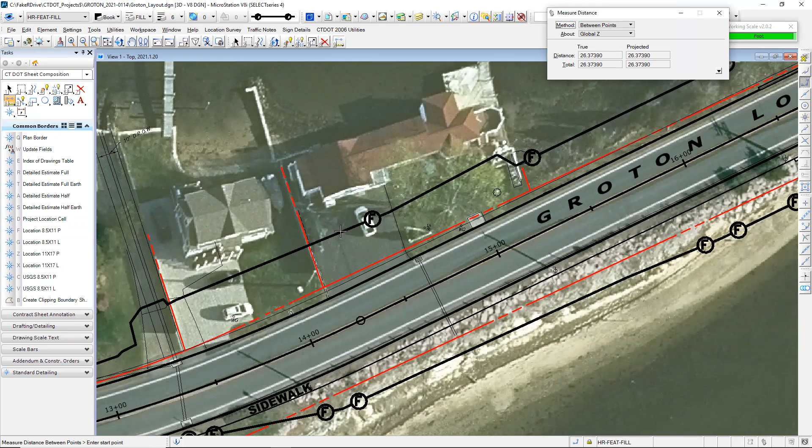I mean, well, it's almost like you're taking away. I mean, it's unfortunate, but you're taking away almost their parking. You know, I'm not sure they'd be able to park a car there. I think it's hard. I have a hard time finding sympathy for that house because it should never have been built there. Yeah, exactly. You know? I mean, this house has a turnaround here, but there's a garage. This is a garage. Yeah, just because their lawn is in the right of way doesn't mean that is their property. They also have a side lot here. And they have a pull-off here.

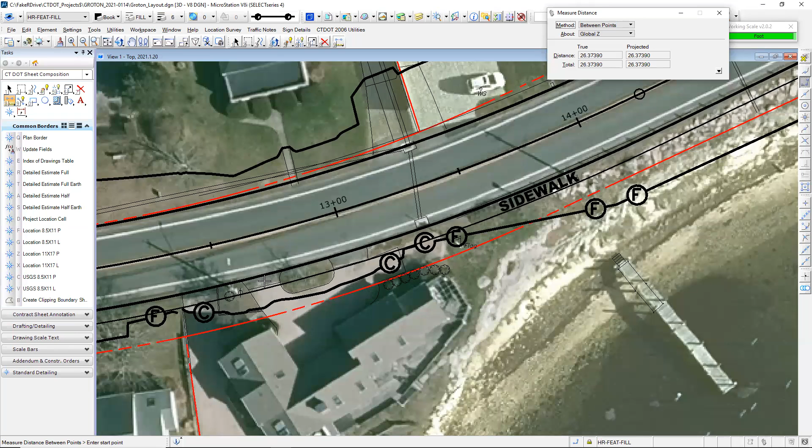So we're not pushing the road toward their house. We're not changing the edge of road. I guess the sidewalk is going in the end of the driveway. Right. I don't think we can resolve that tonight. I think we should just push ahead with it. Absolutely. Yeah.

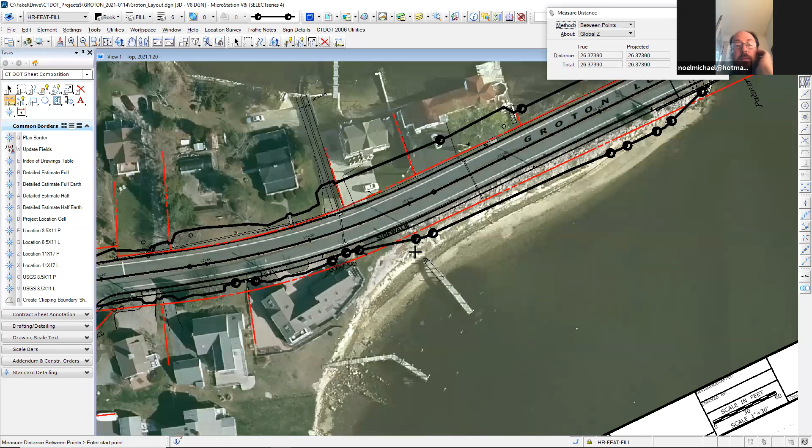I guess, yeah. So it's easy to look at this picture and think about it. Where the grassed area is here, this is where the sidewalk would be. Yep. And you don't think that there's going to be any fill behind it toward the house? No. Everything is within the right of way, within the highway line. There is a very, very slight cut actually in front of this house. Right. You were showing some cut and fill there, but it was pretty small. It was pretty small. It's just because the land is higher up on this side of the road than it is on the north side of the road. Okay.

Anything else? Oh, sure. That was a great presentation. Thank you. Yeah, and I think also, Jonathan, when we get ready to do the federal local bridge applications, we're gonna have to take this to the council and show them what this committee has come up with and where we are. Because they'll ultimately have to authorize us to submit for that.

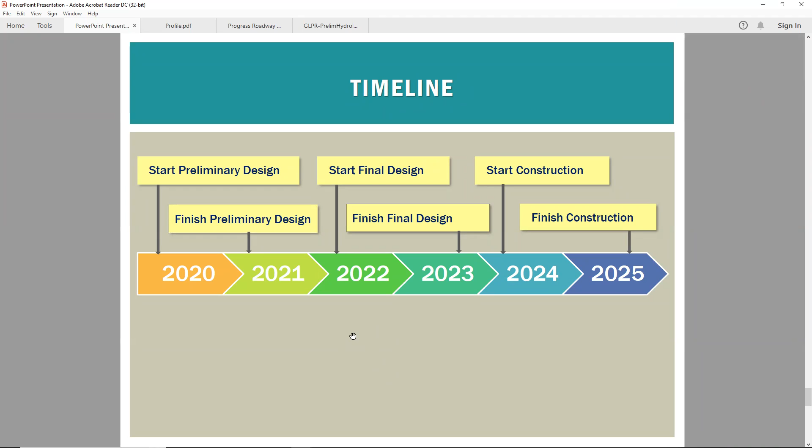Yeah, and we have the website, which, Greg, I'm sorry, has been underutilized, but I think the thing to do would be to get our plans up there. And that's another tool for getting some feedback and just for getting the information out. Websites, from this old fud, are a necessary but not sufficient condition for communication. And earlier on, Frank, I'm sure you were involved with the public listening sessions that we had in Groton, and we're certainly willing and able to come back and do that in person. Right. I know it's a bit of work, but sometimes it's better to do it earlier than later. I agree. Thank you.

Okay. Thanks, Greg. If we're good, anybody else have any other questions, comments? No. So we're meeting in July, you think? I think so. Yeah, you said you'll push ahead with the cost estimate? Yes, with the cost estimate, and wrapping up our loose ends in the design here. Okay. Sounds good.